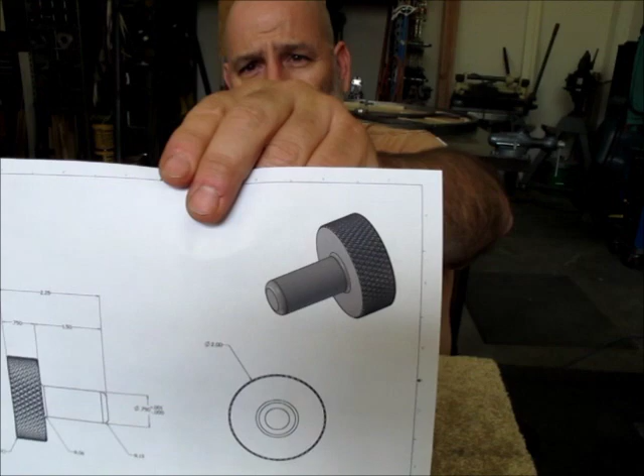So these are here. I got a drawing of what Greg's pins look like, and they're pretty simple. They've got a couple of precision surfaces on them, because when he sets the dies up there's some height issues that have to be held pretty closely, and the diameter of the smaller part here has to be held pretty close too. Now, I don't really want to grind these after the fact, so we have to anticipate a little bit of growth with this particular steel.

Since we're adding carbon to the surface of the material because it gets pack carburized as a heat treatment process, we have to anticipate that a little bit. So what we're going to do is machine it a little bit smaller than what we want it to be after the heat treat, because it grows. On a 1-inch diameter with that particular 40 thousandths case depth, we might expect anywhere from 6 to 8 tenths growth, something like a thousandth of an inch growth.

So what we'll do is we'll be about 8 tenths under the target, something like that, and that way we don't have to do any post grinding or anything like that on these pins.

Now, my project that's sort of going along with this one here, it's already been machined, and it's just been sitting around the shop waiting to get heat treated. And what they are is, I'll show you here.

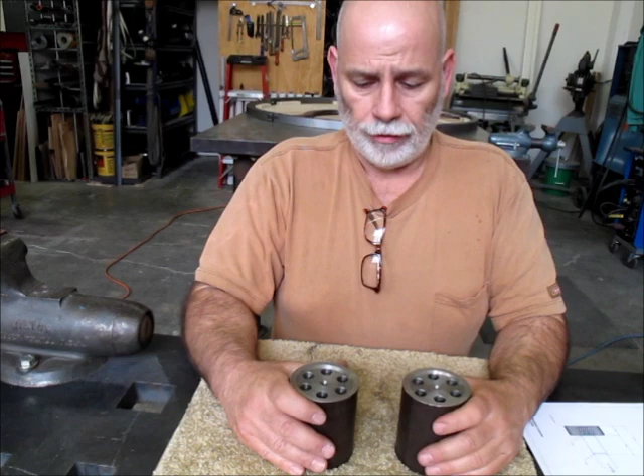These are cylindrical squares. And you can see on the bottom they have some features there, some dust notches and some holes, some kind of lightening holes, and they're both very similar. Anyway, so I machined those a while back, and they've been sitting around.

These are 8620. So the idea here is they have centers in them, and what we do is we get them heat treated, and then what we do is we grind this cylindrical diameter here very smoothly and very accurately, and then come in on the side with the grinder in the same setup, and we grind this end surface.

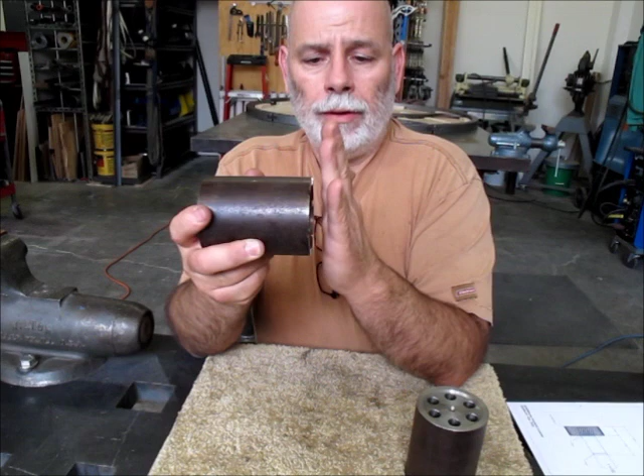And it's narrowed so that it grinds really easily. Same here on this end, and we'll do both ends. So the idea is this cylindrical diameter has no taper, or as little as we can get, and then this end surface is perpendicular as close as we can get it with grinding, which is generally pretty good.

So the idea is these sit -- can you see that? Yeah, okay. Let me back up a little bit.

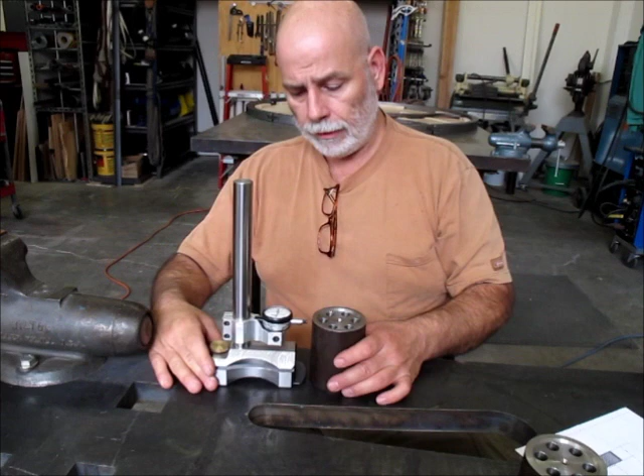So they sit on the surface plate like this, and then what you use is a squareness comparator. I made this one a while back, and there's a blog article on this. Normally you would do this on the surface plate, and the idea is you set the squareness comparator here with the cylindrical square -- this is a known square -- and all this is doing is comparing this radial surface here down here with this indicator point right here.

What you can do with that is now you can very, very precisely check blocks and other objects with this, and it's adjustable back here. It has a flexure that allows you to tune the position here.

So anyway, that's what these are about. If you're going to make one, obviously this is a pretty simple machining job for the rough machine work, and the grinding work takes a little while longer. Once you're set up, it's pretty easy to do two of these. I don't really need two, I barely need one, but I might as well make two, and maybe I'll trade one or do something like that later on.

So anyway, right now we're gonna help Greg with his pins, and so we got some lathe work and some knurling. Everybody always likes knurling, so we'll show some knurling, because he wants the large diameter knurled here. So yeah, let's go do some lathe work.

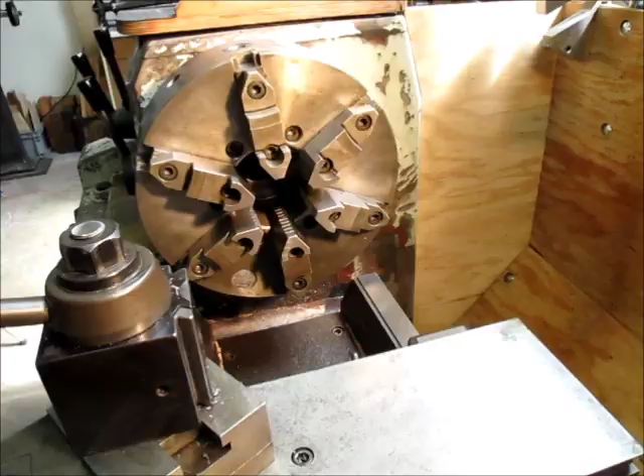All right, so we're over on the lathe now, and we're getting set up to do these press pins for Greg up in Seattle. So here's our starting blank. This is what I had, it's 3-inch diameter, 4-inch long, 8620. So we got to do a little ripping and tearing to get down to these pins. I just happen to have a whole bunch of this material left over from a scrounging mission. So anyway, that's what we got to work with.

So we've got a lot of machining to do, so there's gonna be a lot of tool pressure and hogging. What I like to do in this situation, the first step is on the gripping side. What I'm gonna do is just turn this diameter down, you know, 150 or 200 thousandths, something like that. So what I get is a nice clean round diameter, and I also get a tiny little shoulder here.

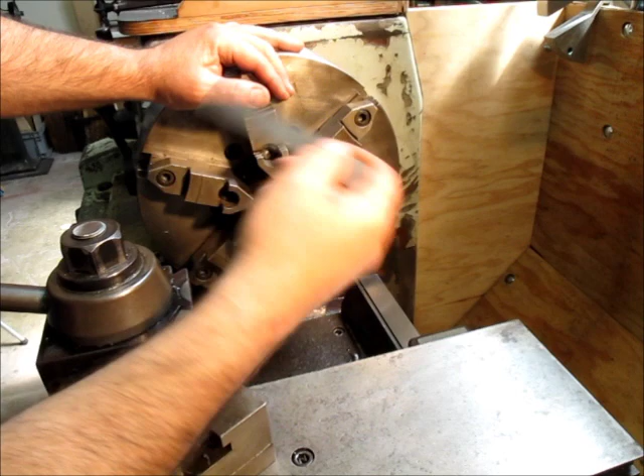You'll see what that's going to do here in a minute. When I flip the blank around, the jaws will grab it, and then that shoulder will seat against the jaws. So it gives me really good grip, it won't slip in the jaws going into the chuck, and I have a nice clean diameter that's been freshly turned, nice and round, no dents, no weirdness, no out of round, so I get a really good grip on it. It's clamping security is what it is.

So we're just gonna spin a little off of that diameter here. I'm just gonna touch off. Touch off there, and looks good. Change the feed rate. See how that is. This isn't a fuzzy dimension, all I care about is that it's round, and I'm going to hold on to about 1 inch. That looks good. Face that edge.

All right, so now flip that around. I'll flip that nice diameter around now, and that's what I'm going to hold on to. Okay, so I got a nice grip on it, I got plenty of material here, got about 3 inches sticking out, teeny bit less than that. All right, we'll get started.

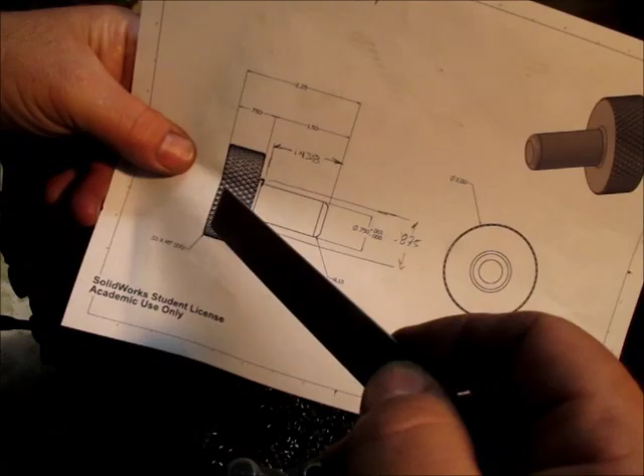That's 250 on the diameter right there. I got plenty of room there, I'm just tearing off this material. So now I'm going to rough in that, I'll rough in the pin diameter. Now there's a 16th corner radius here, and this insert is sharper than that, so I got to leave a little chunk of material in there and use a different tool to finish that, so I can do that internal radius. We'll do that coming up here in a minute.

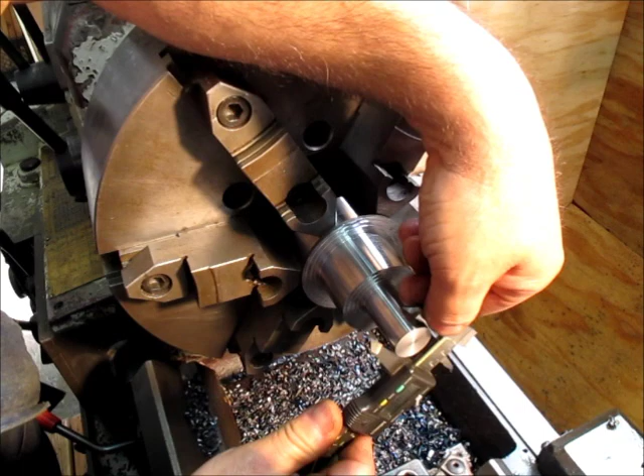So that's just a witness mark, so I know when I'm getting close. That's pretty toasty right now, we're going to let this cool off a little bit. We're at 927. Probably go a little closer than that.

Let's do that, let's take another 50 off of that. Stop right there. But just to give you an idea, I'm squirting a little bit of water in those chips, or a little bit of coolant, and you can see that's where all the heat went.

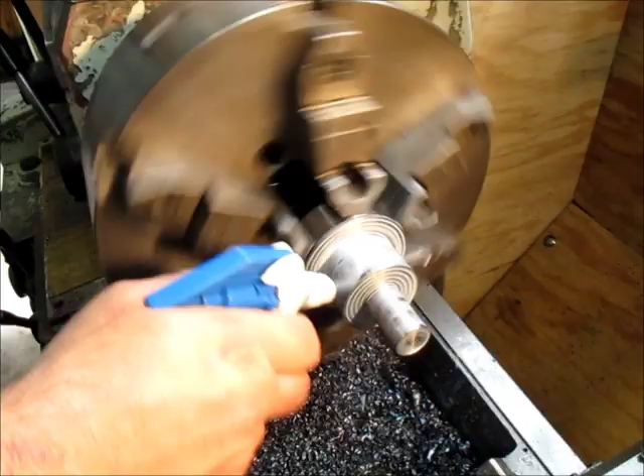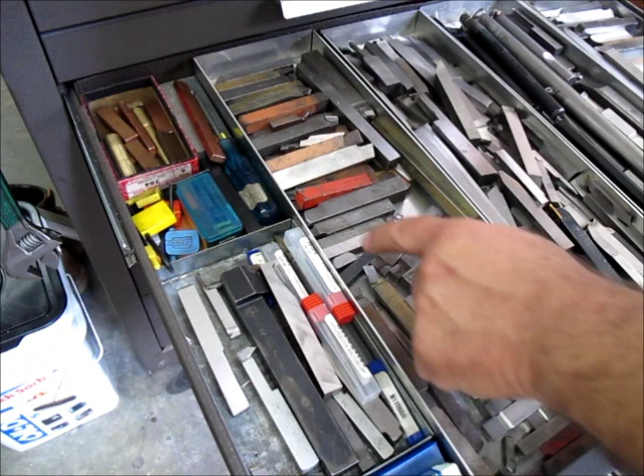So, lead angle on it, you know, you should be able to have something that's pretty close. I want carbide in this case, I want it to, well, it doesn't really matter. Oh, here we go, that looks pretty close. I think it was a 16th radius. Got to get my old man magnifiers here. Oh yeah, yeah okay, feels good. Okay, we're going to go with that one, or we're going to try it, see how it works.

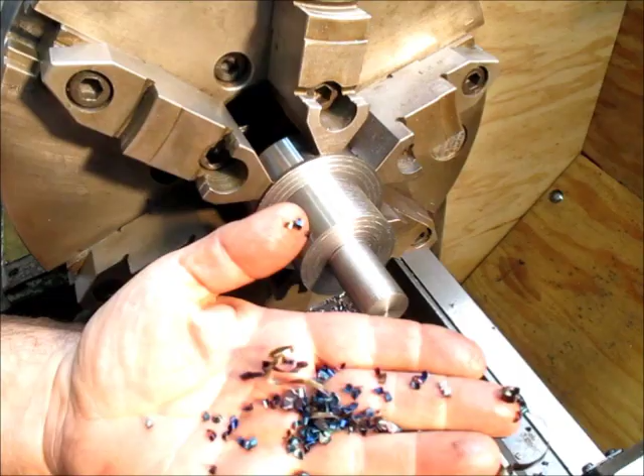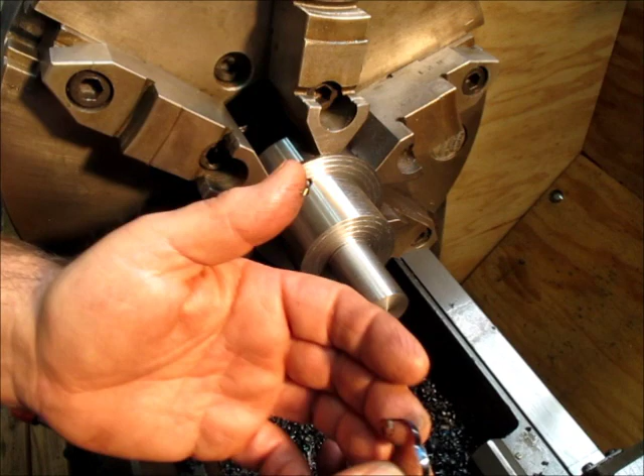Okay, so this is nice and cool now, we can take some measurements and then get it closer for the finishing tool, I should say. An interesting thing here, I'm going to pick up some of these chips. I don't know if the camera's picking up that color though, but take a look at that color. That's 8620, it gets this kind of bluish purple, it's a nice color. I always liked that color when you got nice hot chips there. Anyway, it's kind of a characteristic color of this material, or certain materials do that. It's just kind of a purplish blue.

Okay, so let's just take a quickie here, 880. So that wants to be around 7/8 diameter up to this little step here. What did I say, 880? 885. So we need to take about 10 thousandths off of that, and then we can come at this with our finishing tool here. So let's come up. Oops.

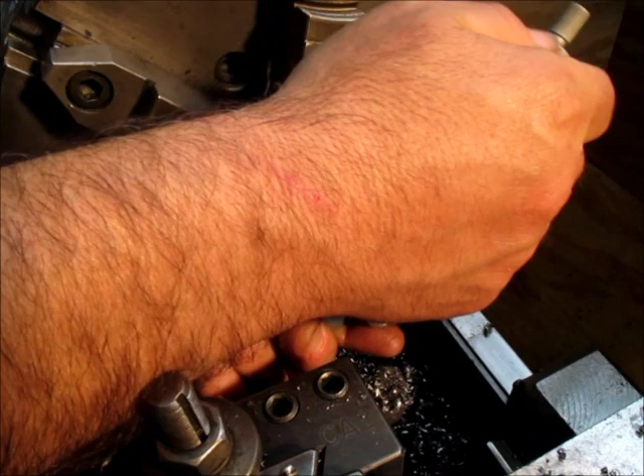Alright, let's use a micrometer here. Okay, so I got about 4 thousandths left on that. It's a little warm, so I think what I'm going to do is come up into that corner and face that off a little bit and get it closer to my Z depth. I'm really not going to take any off of the diameter here. Actually, I'm just going to go right into the bottom in there. And come on out.

And now we're going to go back and finish that and knurl that. Okay, so we've got our knurling tool here, and then these are the knurls, can you see that? Those are the knurls we're going to use. These are crowned Accutrack knurling tools, and here's some other ones here. Straight knurls and then finer knurls. Now these guys here, these are diamond knurls. We got one right hand and one left hand.

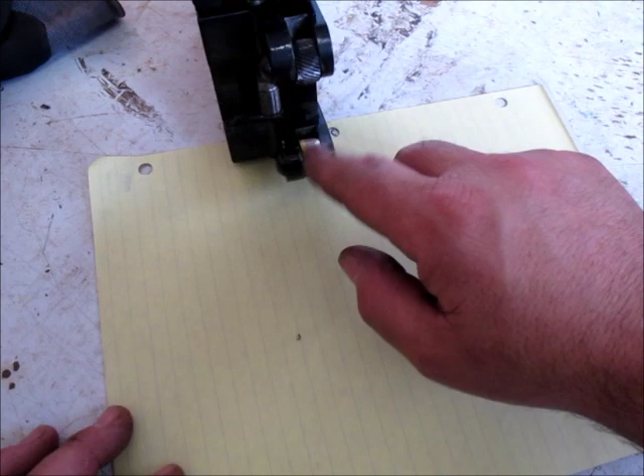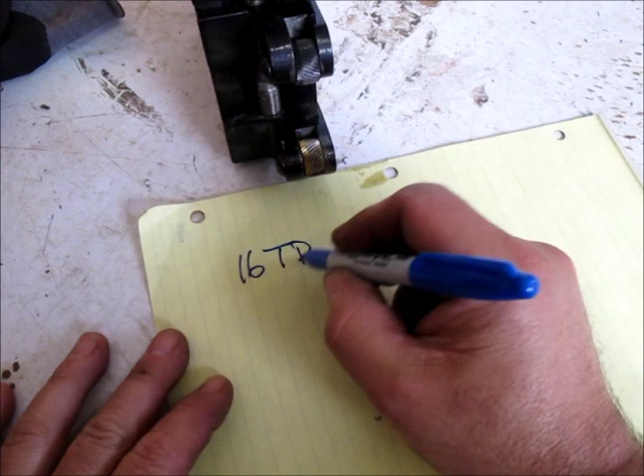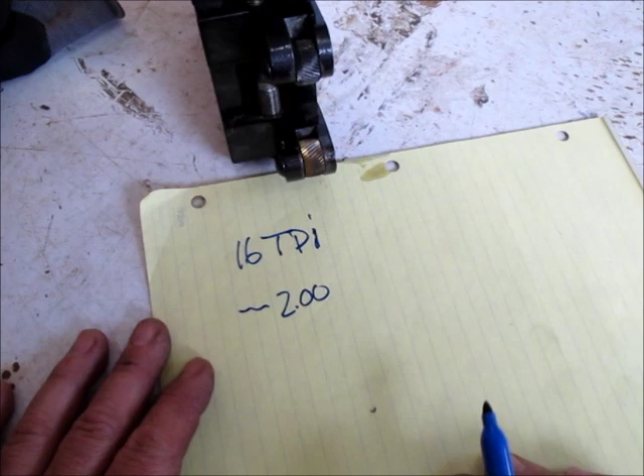And what those are, let's see, let me get my Sharpie out here. Those are 16 TPI, so that's teeth per inch, okay, is what that means. So the diameter that we want to knurl on is around 2 inches, okay? So the first thing we do is we want to figure out what diameter we need to knurl on, okay?

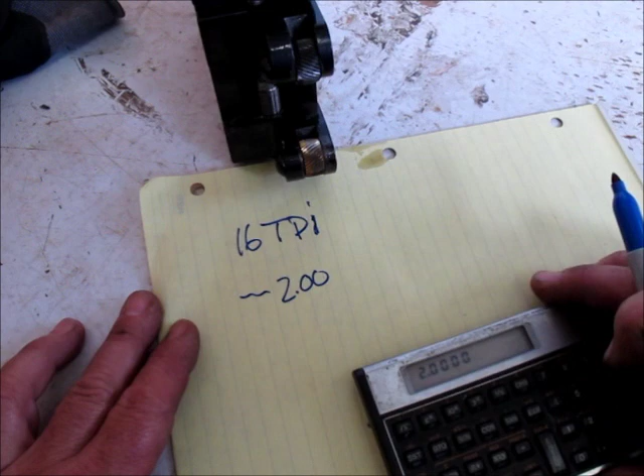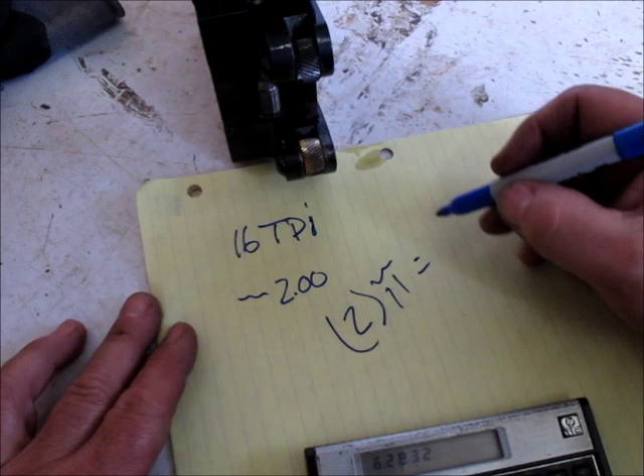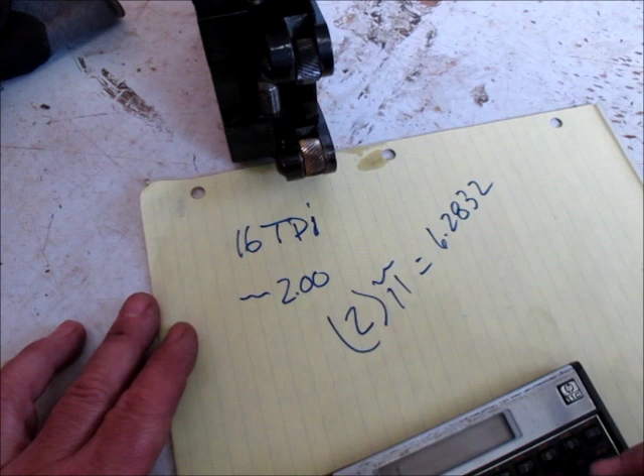So what we're going to do is we'll just take our 2 inches, 2.0, okay? We're going to multiply that by pi, 3.1416 times. So 2 times pi equals 6.2832, okay? And then we're going to divide that by, or multiply that by 16, okay? And so what we get is 100.5312. Okay, so what that means is there's 100.5 teeth in a 2 inch diameter. So that thing will track around there 100.5 times.

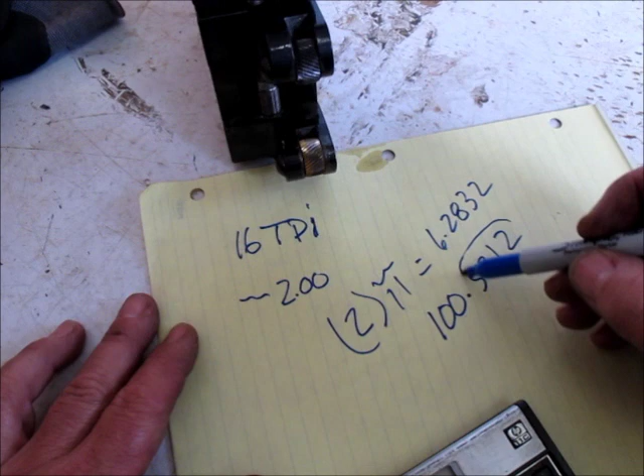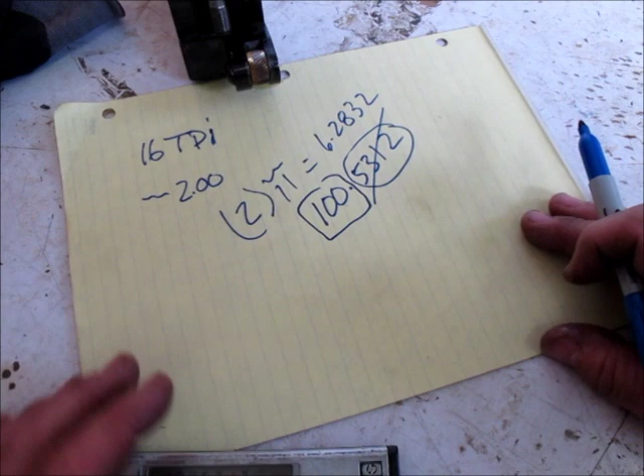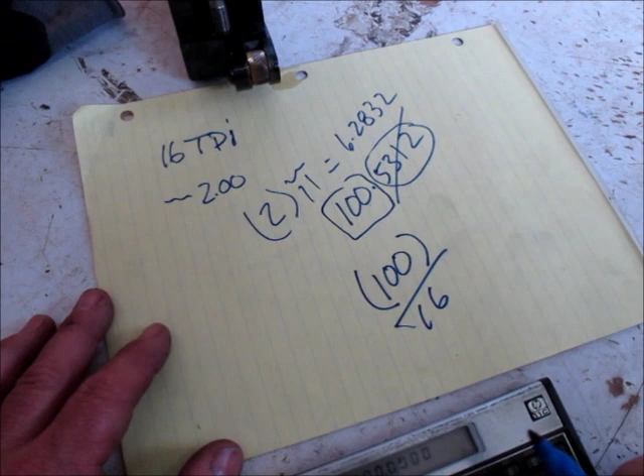Well, this is the part that's the problem. So what we want to do is get rid of that. This is what we care about right here, the whole number. Okay? So what we're going to do is take that, push this back a little bit. So we're going to take that 100, okay, and we're going to divide that by 16. 100, 16, divide. So that equals 6.25, okay?

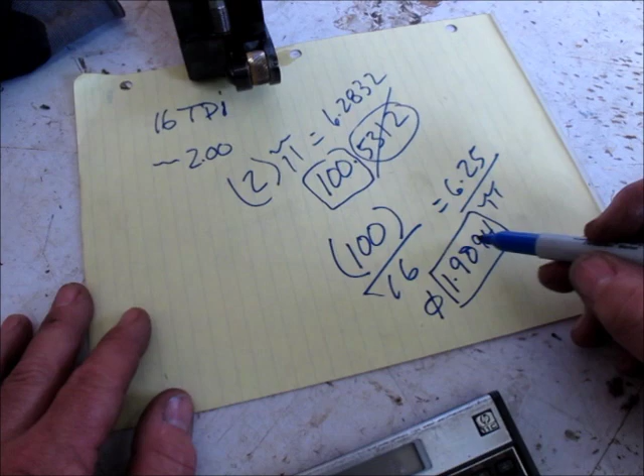Now we're going to take that and divide that by pi, okay? 3.1416 divide. Now we get 1.9894, okay? So this is our actual, what that means is that's our diameter, okay, that our 16 teeth per inch will divide, track on as a whole number, okay? So that's our target diameter for turning for these particular knurls right here.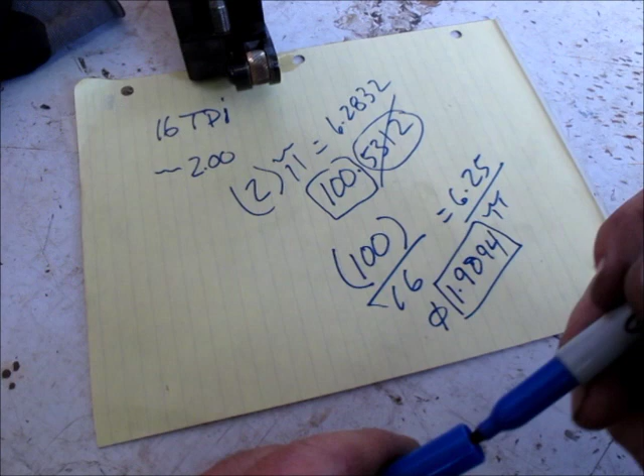And I showed this once before on the straight knurl, and you know, it's kind of the same thing. And so let's go ahead and turn that, and then, you know, see how it comes out.

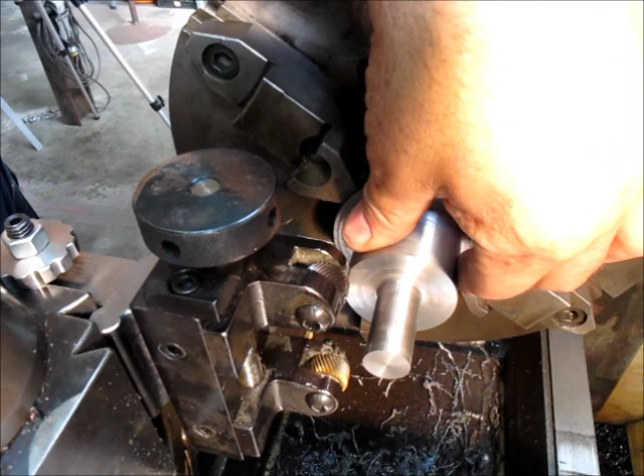All right, so I got this diameter turned to our 1989, which is our knurl diameter. So we're going to come up and knurl this guy right now.

So what I do is I come up and I set this particular knurling tool. There's a bunch of different kinds, but this particular one I set it, you know, like 11 and 7 or 10 and 7 or whatever, kind of opposing like that. And what I look for is when I come in that these touch at the same time. Okay, that's pretty close. So it looks like I'm just a shade high.

Come in and I'm just coming up until the roller touches and starts to bite. Okay, and they're both biting. Free. Okay, so that's pretty good right there.

So now what I'm going to do is shift to a slower speed, change the feed rate, back up. So that's 15 thousandths per rev feed. I'm going to come up and just touch, and then I'm going to note my dial setting here. About 100 and about 100.

Pretty good. All right, that's a gnarly knurl, huh? That's pretty good. I could stop right there almost.

You know, that's always the thing with knurling, right? Oh, one more pass, come on, just go for it, and then you end up blowing the whole deal there, right? So, well, I'm gonna go one more.

Okay, I've engaged the rollers there. Hopefully I don't double imprint there. Let's go for it.

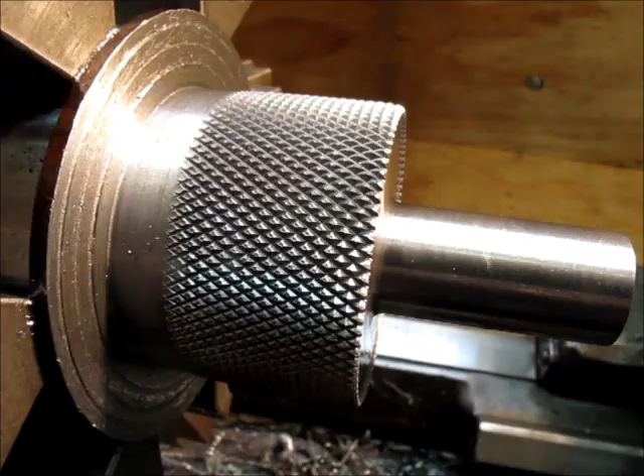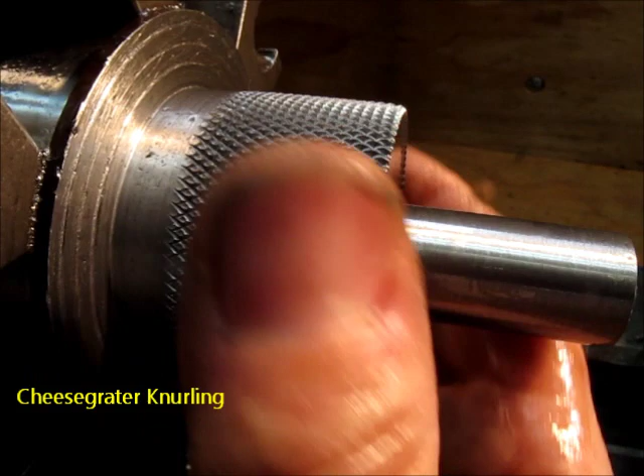Okay, so there's the knurl we just did there, and that's a pretty coarse one there. Greg asked for a medium one, but this is what I had, so this is what he gets. So anyway, that's kind of a different way to knurl. Hopefully you guys got something out of that.

Alright, so now we're going to use a little radius tool, a little form tool, to put a radius on the end of that. And so here we go.

So what I do here, just so you know what I'm looking at, is I'm looking at where this touches here. I don't want the corner to bite, so I'm just going to back off from it a little bit, and then I'm going to come up until I just see that scrape right there, okay?

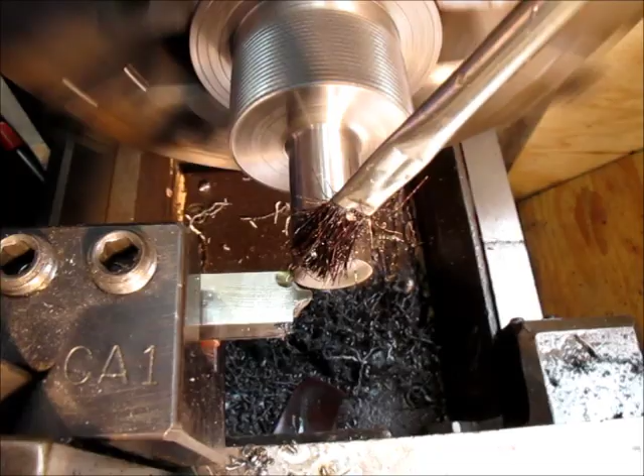And then keeping it wet with the brush, I'm going to feed in Z now. That way I only have to look at one direction at a time when I'm using the form tool. What I don't want to leave is a hard line in there that's difficult to get rid of without going to a larger radius. This is a 1/8 radius here, about 3 millimeters for our metric viewers.

And then, with any broad cutting tool, you want to just go slow to make sure it doesn't chatter right at the last little bit. And I'm just clearing the chips so I can see what the heck I'm doing there. And I'm getting pretty close now. I think I'm going to call that quits there.

Okay, last operation on this is parting off, and we want to make sure we got plenty, because he needs a precision thickness from this to the backside. So we're going to leave it long, and we'll turn it around and put it in a collet and face that backside and measure that real carefully, and then dress this edge and the other edge at the same time. So the goal here is just to knock it off, with plenty of meat, which that should be fine, and just part this sucker off and get her done.

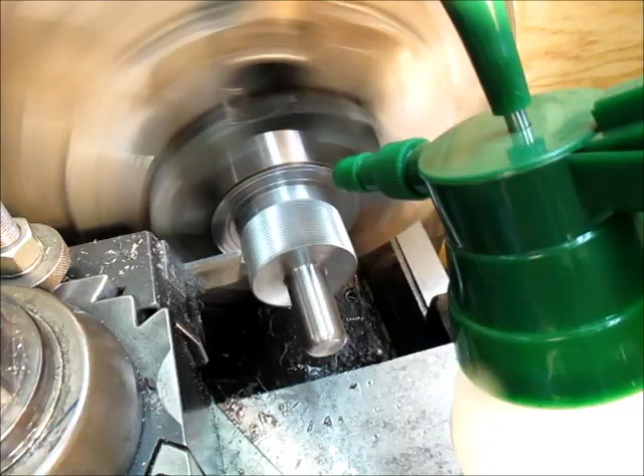Okay, so it's about 160 RPM, something like that. And this ought to be interesting with this camera here. I really want to get this in there like that so I can get some liquid in there. The goal is just to keep that groove wet, and that way the chips flow out of there nicely.

Hard to see, leaning over. I'm getting close now though. I'm gonna have to let go of the... yeah, let's let go of that.

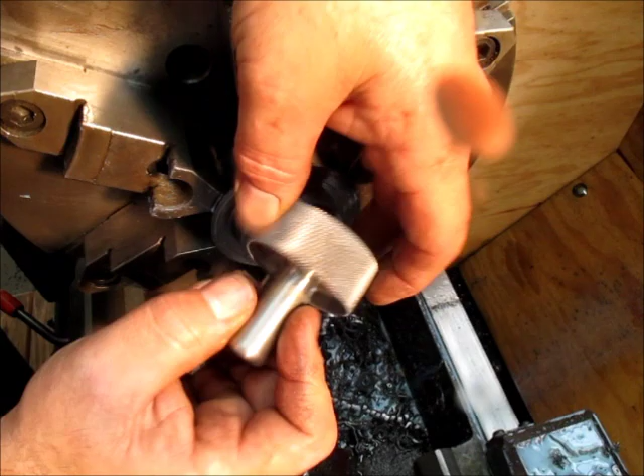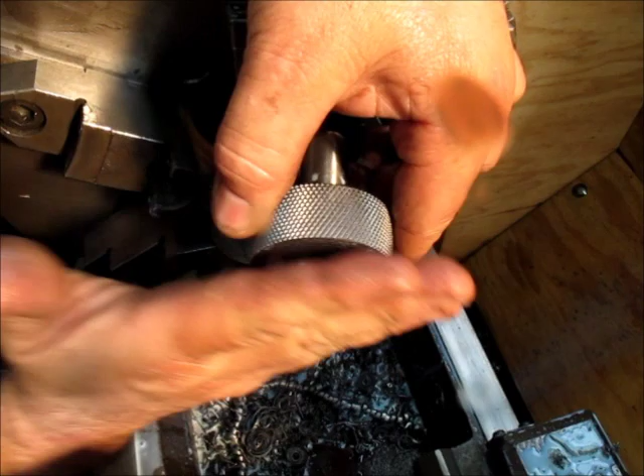Good. Okay, there's our product there. So yeah, I'll go back later on, and you see the knurling's kind of rolled some of that over there, so that'll come off with a little chamfer, and then we'll face this to thickness and measure that carefully, and then add the same chamfer there, and then that's one of Greg's pins.